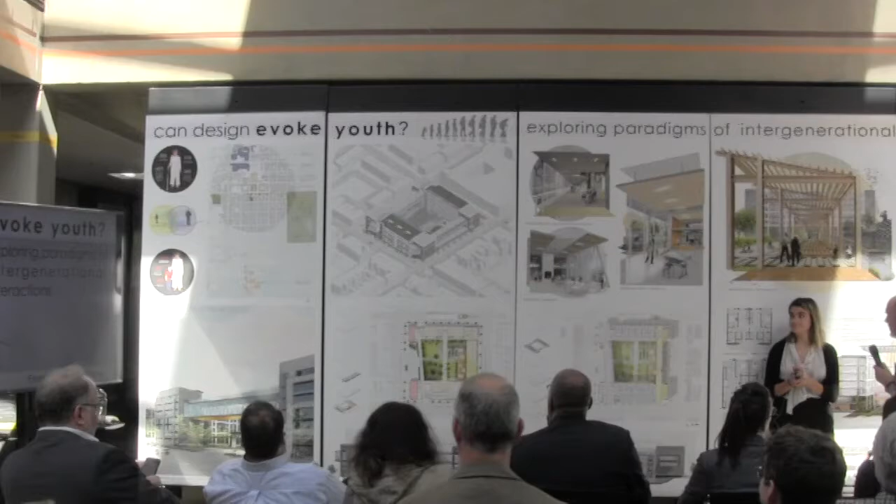To Baltimore? Baltimore, okay, not too far. Happy New Year. Baltimore.

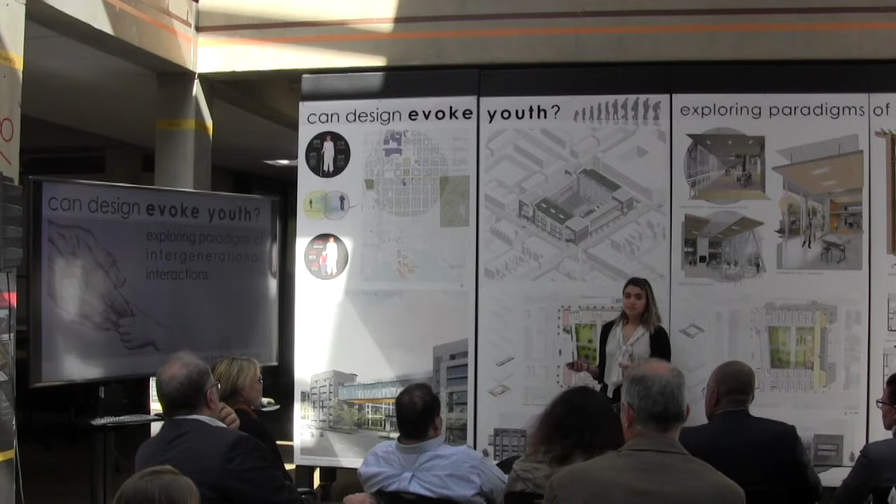Without further ado, I'd like to introduce you to the thesis, Can Design Evoke Youth? Exploring Paradigms of Intergenerational Interactions. This thesis challenges the way that architecture addresses aging, and presents unique opportunities to look at senior living in a new light, presenting opportunities to instill different social constructs that are more inclusive across generations. To begin, we'll start with the origin of the question, then move into an analysis of how we came to the site in Baltimore, and then into the design strategies that ultimately drove this final design.

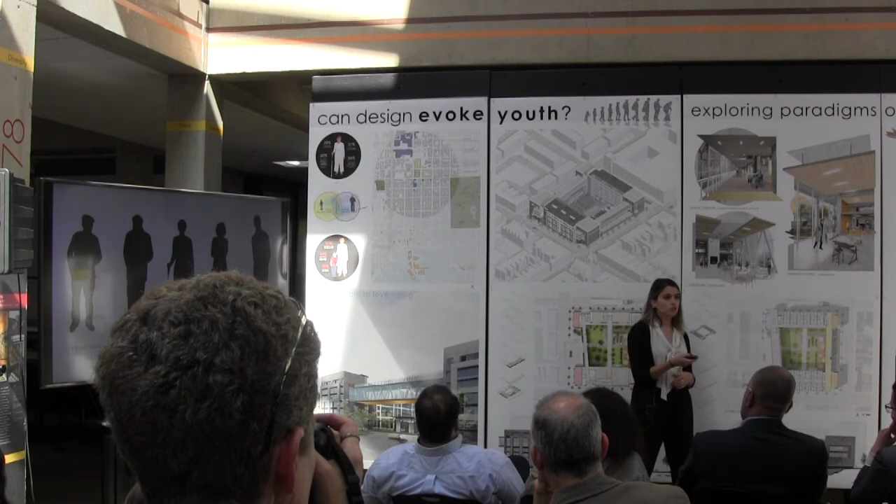So to start off, I have a question. When you think about aging, what comes to mind? What does aging look like? What does it feel like? Just think about it.

And then another question is, think about retirement. Now when you think about retirement, what images come to mind? What are the things that motivate you after retirement, after you've finished working on a day-to-day basis? What new life goals motivate you?

These are all questions that in the next 10 years, 1 in 5 people in this country will be faced with. Thanks to the baby boomer generation, we will be reaching a new high of senior population, people aged 65 or older. I believe that a lot of times these two questions evoke different images in your minds.

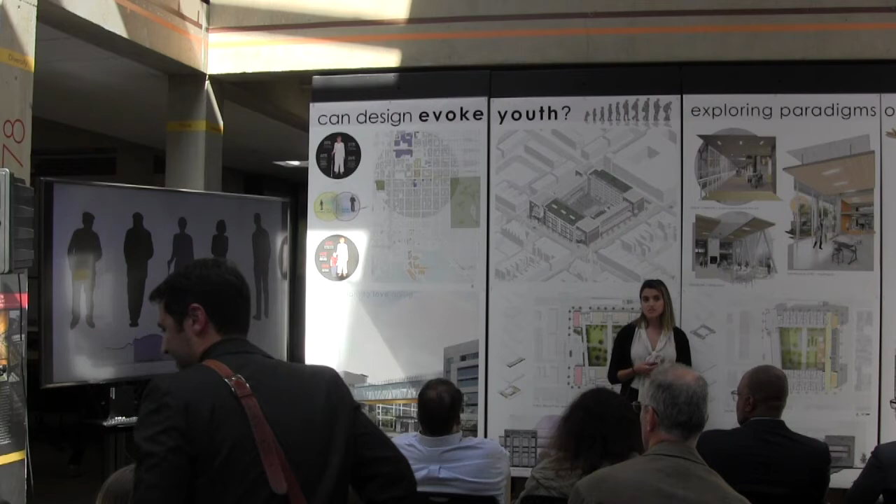A lot of times the idea of retirement might become associated with vacation, relaxing, or spending time with friends and family and grandchildren. Whereas when you think about the word aging, sometimes it's loaded with negative connotations, such as accessibility issues, or wheelchairs, or memory loss, all of these things that start to trigger negative emotions.

Now why is that? It's due to an inherent ageism that's prevalent in our society. In other words, this disconnect between younger and older generations. And this comes from a lack of understanding of what aging really means.

From a young age, we learn that it's scary to get older, scary to become an older person. And then once we finally reach the point in which we are older, we're suddenly faced with all of these new life obstacles that we don't necessarily know how to tackle.

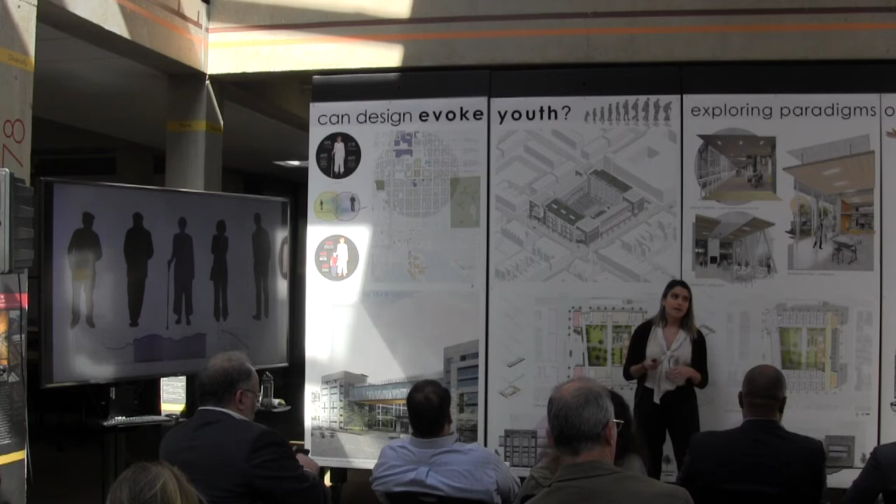This drives a wedge between the younger and the older generations, and ultimately starts to separate and segregate, resulting in social isolation of the seniors. And the seniors, as they become more socially and physically isolated, start to gain this sense of perceived loneliness. Perceived loneliness has incredible detrimental effects on your mental health and cognition, and can increase your risks of developing dementia. All of these things can result in this negative feedback loop.

So as these seniors are encountering these new life changes, these new circumstances, they might find themselves frustrated or irritated and start to feel further disconnect from those younger members of society. So how can we start to tackle this problem? How can we begin to rewrite the narrative of what aging really means?

Well, let's start at the beginning. By introducing young children to the concept of aging, by integrating them into spaces with seniors, we can begin to retrain the way we think about aging and what it means to be an older senior.

83% of retirees agree that working during retirement allows them to stay more youthful, while 45% are particularly interested in working with children. This is all because they gain a new sense of purpose, meaning, and a revitalization in youthfulness through this engagement and interaction.

On the other hand, children have much to gain by having this kind of mentor-mentee relationship with an older, trusted adult. They have the opportunity to gain valuable life lessons and learn new life skills from much more educated and experienced members.

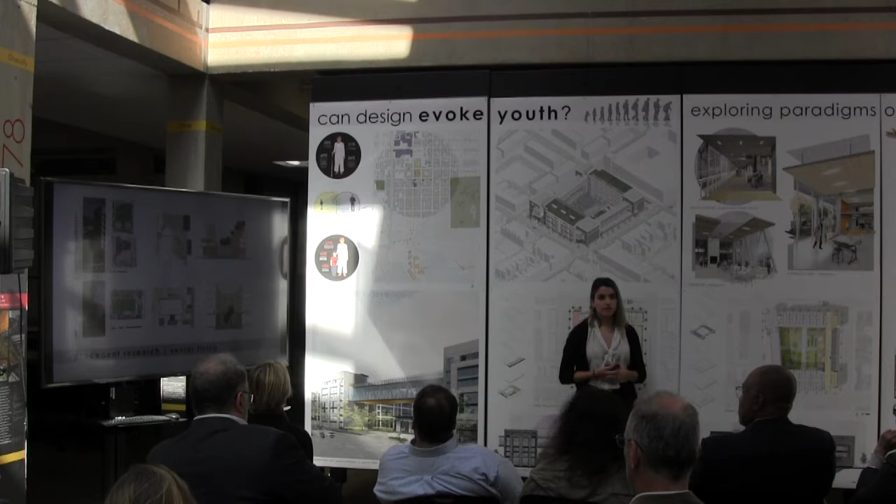So this led us to some design strategies that were accumulated by studying precedents. We began with looking at senior living precedents. Naturally, if we want to design a building designated for senior living, we want to be sure to understand the positives and negatives that exist in current models.

And something that I came across in this study was the common theme of organization around a central courtyard. There's a common outdoor space that is used by the seniors and sometimes by the public as well. This is often either directly next to or a little bit set back from where the seniors are living, allowing them to interact as they so choose.

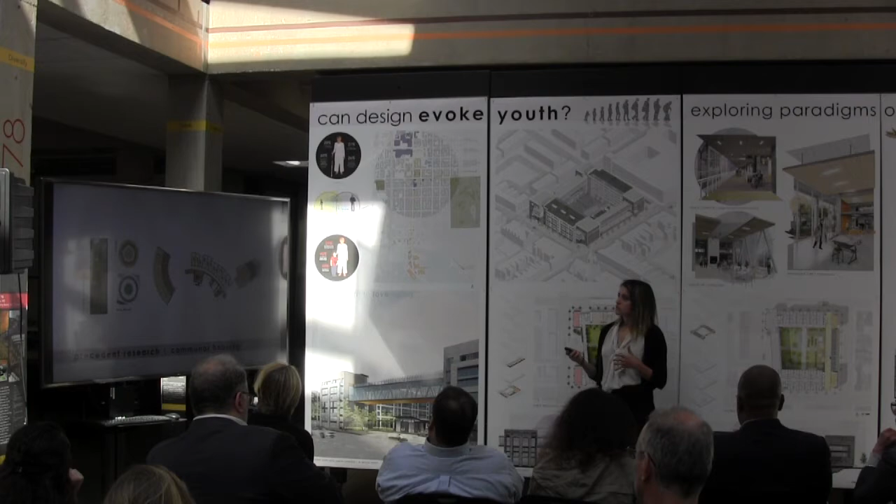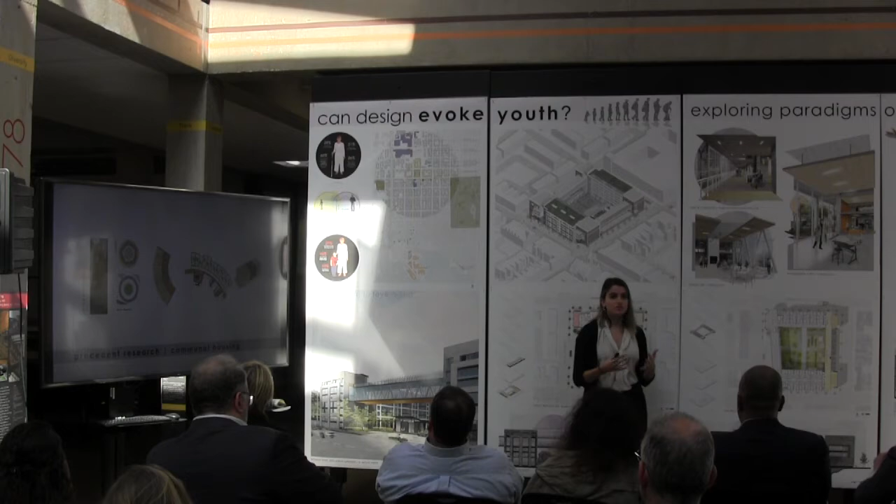Moving forward, I also looked at communal housing, specifically student housing, both international and national examples. This is because student housing has a similar goal of creating spaces for students that allow them to have independence and secure spaces, while also maximizing opportunities for social integration and social interaction with each other.

And then finally, I looked at examples of early education models, and this was to not only design spaces that are fun and engaging for young children, but also to look at the way they too have an interaction with nature. They often have outdoor spaces for children to get outside and play around and not feel boxed in.

And so altogether, this drove several precedent principles, which began with senior living and ended in that early education model. These principles include designing spaces for spontaneous interactions, allowing children or seniors or both to find opportunities to passively and actively engage with each other. It also reinforced that idea of the threshold between indoor and outdoor, having different types of spaces that remind them constantly of nature and the outdoors, and then giving them spaces not only for their own independent zones, but also allowing them numerous opportunities to engage with each other and the community around them.

And finally, there are principles too that pertain to the particular senses, which include looking at the use of light and color, the use of haptic feedback, and once again, that connection to the outdoors, both for materiality and space design.

Moving on to how to implement these design principles into a design, it's important to understand that there need to be sacred zones for seniors and for children in a space like this. Realistically, seniors won't want to see children 24 hours a day, so they'll need spaces that separate them on occasion, but also intermediate zones where they can cross over as they choose, both passively and actively.

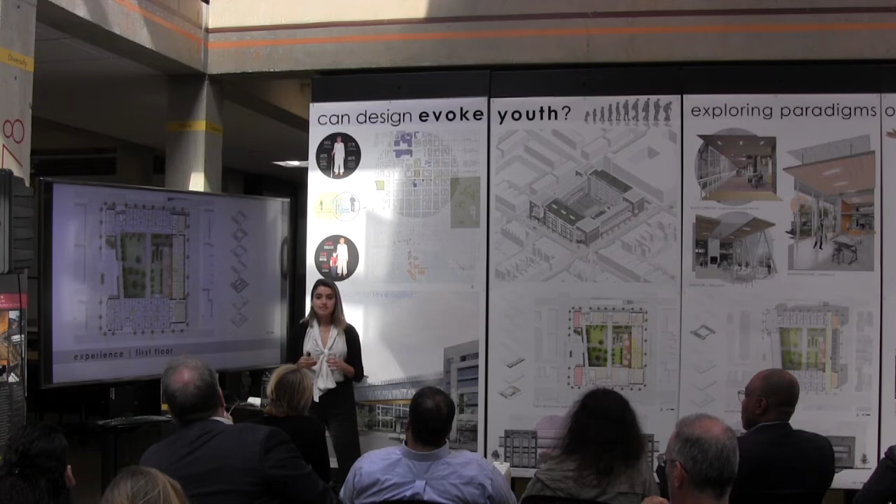If you look over into the west side of the building, this is where the senior living begins. All of their residences start here and move upwards. This doesn't have direct access to the learning center at this level; instead, you have to move through the communal spaces on the courtyard level. This again pays attention to security throughout the building by minimizing those breach points.

Finally, on the third floor, this is where those sacred zones pop through. In the seniors' sacred zone, pictured here, you've got a double-height space used for a general dining hall, but it can also be transformed into a community room. There are resources off to the sides that fuel those dining halls and needs, as well as spaces in those volumes that pop out for social spaces and lounges.

And in the children's sacred zone on the right-hand side is a library. This is a sacred zone just for the children where they can read and learn and play, and then observe the activity happening down below.

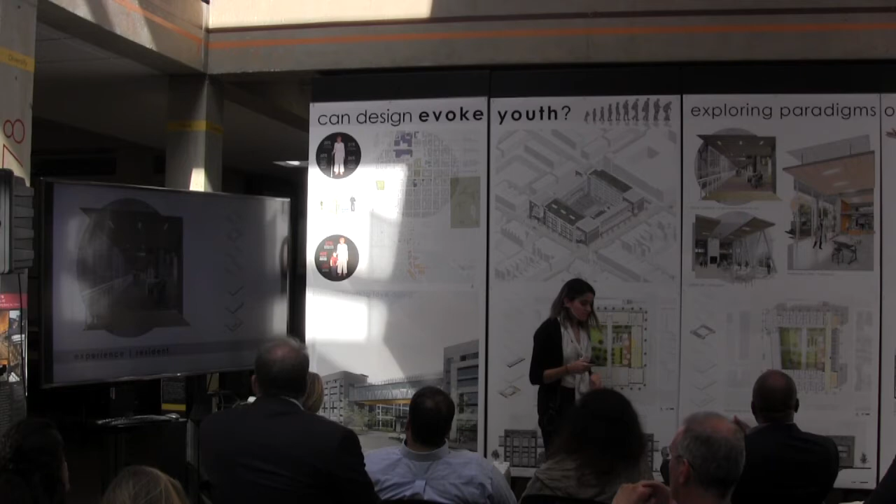Before I wrap up, I want to walk through the experience of this building as both a senior and a child. As a senior resident, you might wake up in your apartment and walk out into the hallway, look out into the courtyard, and observe the activity happening down below. You might also turn to your neighbor and sit on your porch to have a conversation with them.

You might then proceed down the hallway into the dining hall, where you have a communal breakfast with some of your friends, while others might be spending the morning having breakfast in their own homes, where they're provided their own kitchenettes.

For that afternoon, they might decide to go downstairs into the intermediate zone, the first zone on the ground level. Here they might spend the day painting, making music, or exercising. In these kinds of spaces, they can start to interact with children, since these rooms have been designated as spaces that can also be used by children in a safe and friendly environment.

Then they might move their way down through the courtyard, down this pergola, from one wing to the next. Through this pergola, they might walk from the music room to the exercise space, or from the swimming pool over into the art space.

From that movement, they might decide to move into the learning center. As they move through the learning center, they might pop up into the entry corridor, into the entry atrium, where the cafe is on the ground floor.

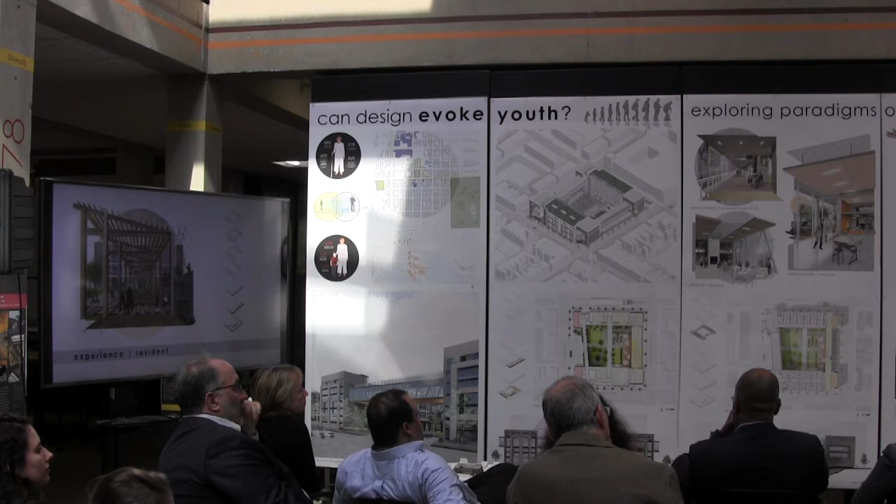There, they might sit and enjoy a cup of tea while reading a magazine and observing the children entering the daycare for the day and running around. They might also proceed down the hallway and see more children running around in the collaborative learning environment, running in and out of the classrooms.

They might also enter one of those classrooms and use this as an opportunity to teach a life skill, such as art or music, to one of the children in these flexible classrooms. Finally, they might spend the rest of the afternoon in the art gallery at the final culmination of that hallway, and up above, you can see children walking around a catwalk.

At this point, I'll transition to the perspective of a child. This child has just walked out of his sacred zone into this catwalk, looking into that atrium. Down below, he might see a performance going on, he might see people observing the art, and he may decide that he wants to go down there, or perhaps he's a little bit shy, and he decides to step back into that sacred zone.

Here you can see there are small openings for them to observe more passively, without being as engaged as he might be if he were actually in that space.

Then finally, he may step into the sacred zone and go into the children's library. Here he might spend some time with his friends reading a book, or sitting on the stairs, or sliding down the slide and joining his friends at the bottom.

He might then step down into the ground level, or take the elevator or the stairs down to the ground level into these classrooms that are either private, specific for the children, or these flexible classrooms where they can again engage with those seniors in a learning environment.

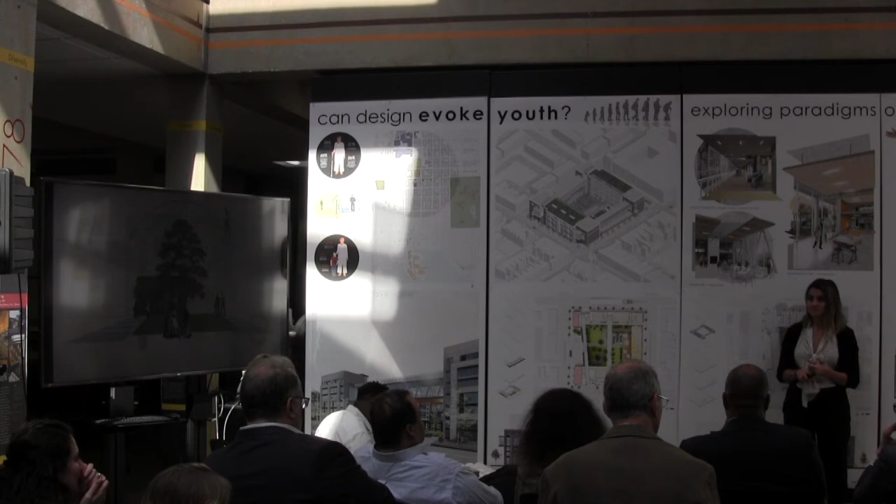How big is that courtyard? What are the dimensions of it? So the courtyard is about, it's almost a square, so it's about 160 by 160.

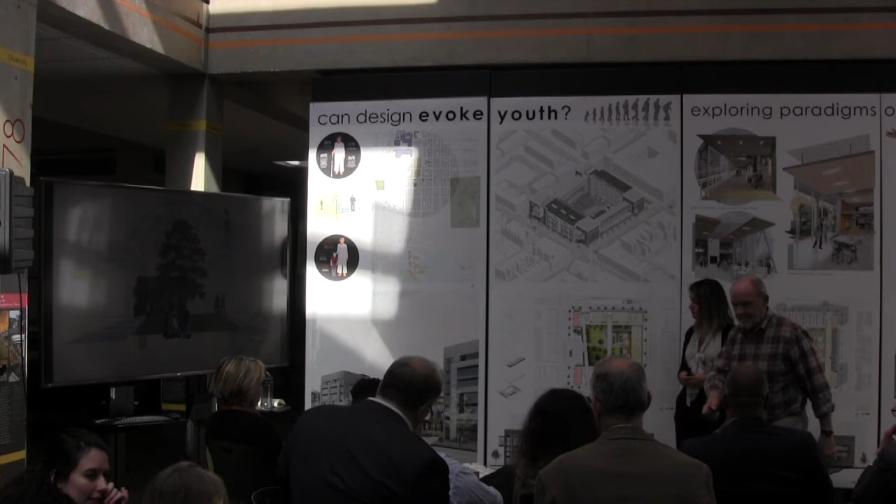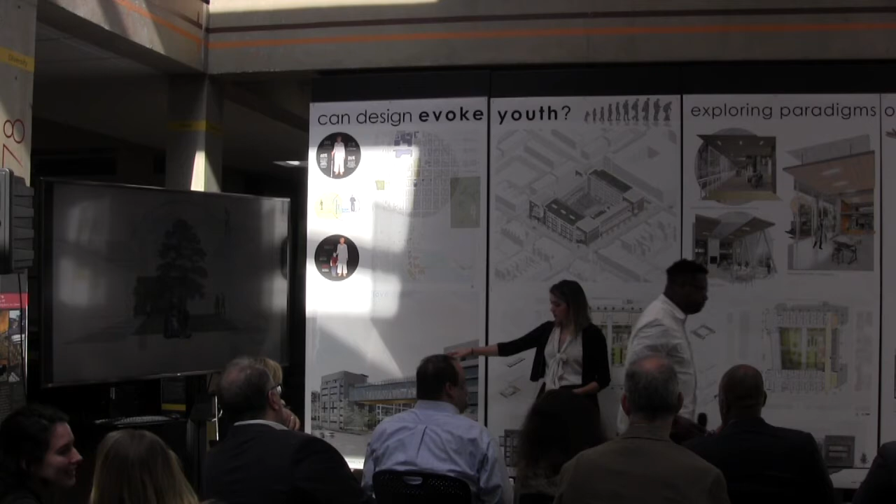Can you talk a little bit about the development of the facade as you walk down the street here? I think you showed it in that elevation down there. Yes. What's the actual pedestrian experience as you're walking along this building? So yeah, that's also in this image here. As you're walking down this street—sorry, let me remind myself, this is Wolfe Street, and this street leads up to Johns Hopkins Hospital. As you walk down this corridor, you see the bridge between the two.

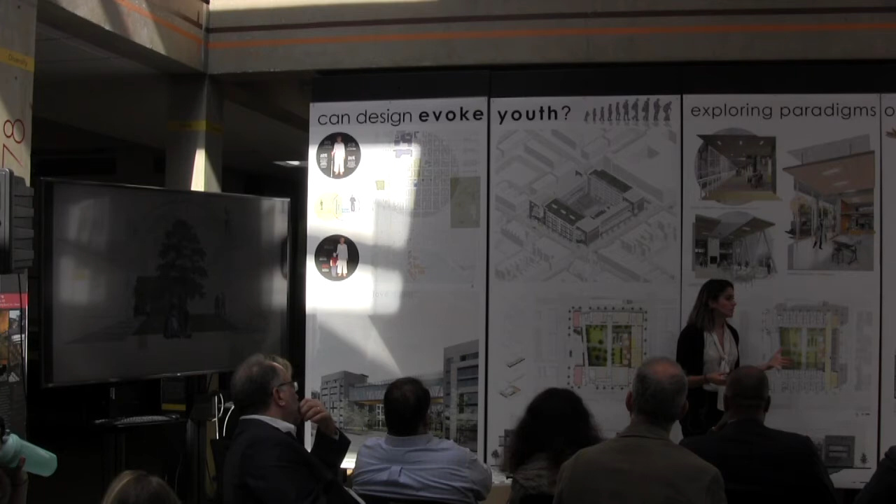You're actually able to look inside the courtyard between the two residential wings, so that's beneath here. Is it open then? Let me see if I can find a good image of it. There's a pergola, similar to the pergola happening in the middle of the courtyard in this big image here—there's one at the entry point as well. There's a welcome house in the center that you enter through, and then you walk through the pergola to your residential wings.

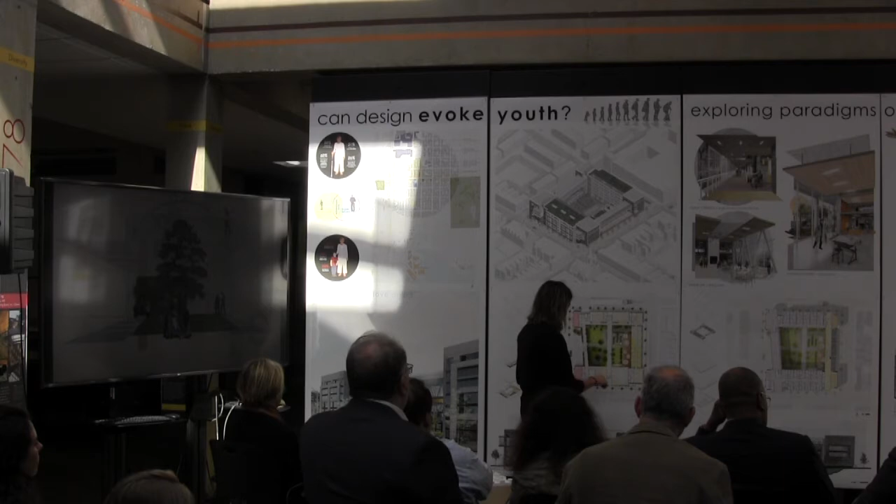So as I look at this elevation, what am I seeing? This is the opposite side of the building, actually—this is the learning center. So the one you're thinking of is this one here. You see the welcome house with the pergola, and there's a lot of landscaping and small walls that prevent you from just walking through to the courtyard. So you have to first enter into that welcome house before proceeding into the courtyard.

So it's a secured courtyard? Yes, it is.

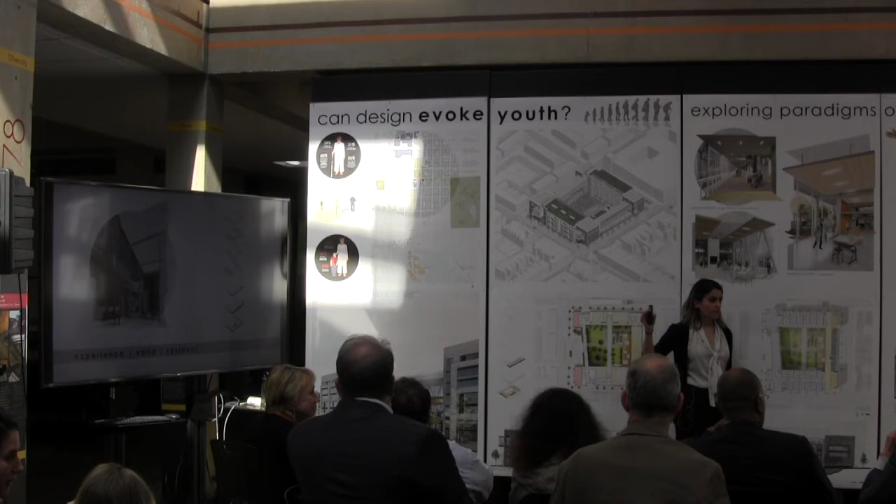I have one quick question. How do you get from—if I'm a child and I'm in this area down here, in the learning center—and then I want to go up and be in the sacred space, what path do I take to do that? Certainly, so it might be hard to bring the image up on the screen as well. This is the entry hall. So when you walk into the learning center, that's this space here. You walk into this volume, and when you walk inside, that's what you see.

Where is that on the plan? Over here. Okay, so that's like a triple height space. It's a triple height space, so that gets you from the learning center all the way up to the sacred zone. Where exactly—you're sort of bypassing, and so then on this side, is that also a triple height space at the bottom? Yes.

So those are those two giant spaces that connect you across. And what was the thinking that made that space become elevated a full—obviously you're building a roof and then building an underside—so what is the thinking behind having the gap in elevation? I wanted to enhance the sense of separation in certain private spaces.

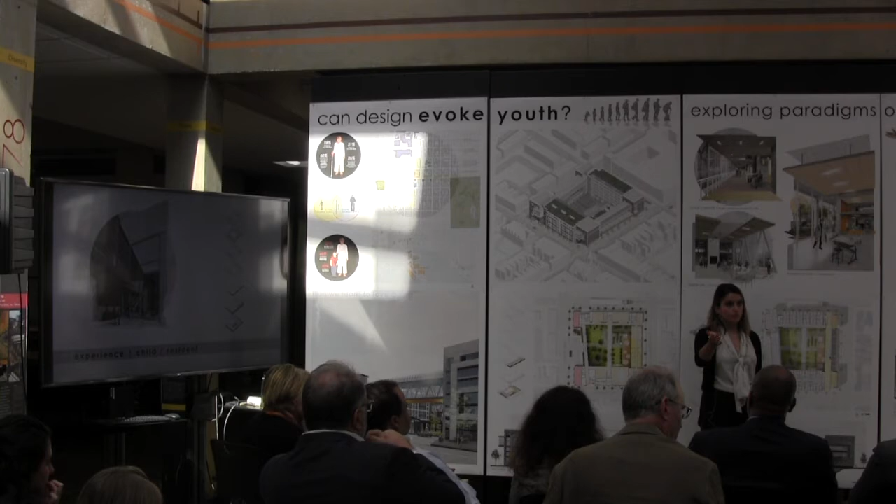Since this whole building is really integrated amongst itself, it creates a lot of spaces where the seniors and the children can overlap. I wanted to make it both visually and physically clear that there's a difference between the zone down below and the zone up above. Pulling them apart creates a sense of passing through a different threshold to get into a new type of space. If they were on the same level, it might feel more accessible for anybody to enter, but I wanted it to feel like a sequence you have to get through to reach that space — a sequence only the children should really be experiencing.

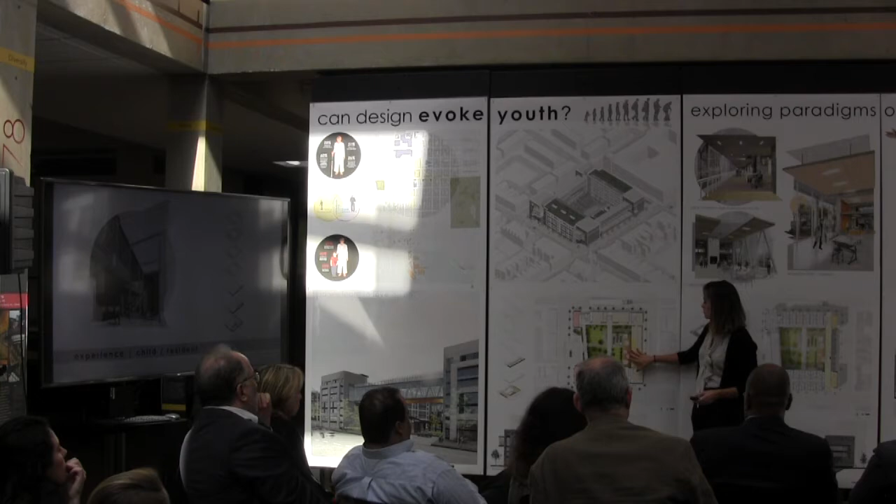Do the children ever use the courtyard? Yes. Where do they access it? The courtyard is accessible on the ground level, but their own little play space is immediately accessible from the mezzanine level. So you have to walk down a level from this entry point to get into the first courtyard. I wanted to keep the courtyard primarily on the same level as where the residents live. Is that the section right there? Yes. You walk in through this entry level and then walk down this big staircase, which you can see in this image, and that opens up into the courtyard.

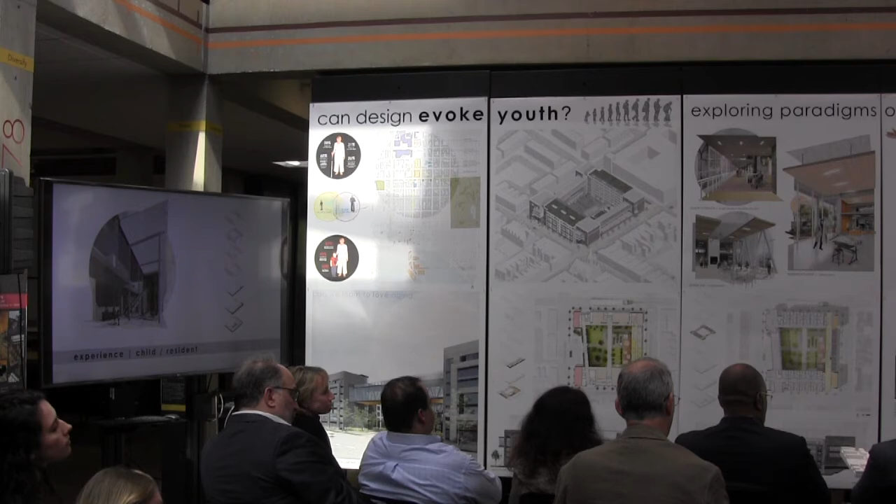Did you ever look at having all three levels together as one piece, without the gap in between, right here? I did. Originally I had some different forms — I have a lot of study models. Some started with almost a C-shaped building, with some sloping aspects. Ultimately, I explored the idea of the roof plane being accessible, but my fear was that people coming off the street would start to wander onto and into the building, breaching its security. I explored this for a long time, but ultimately decided I wanted to keep that sacred zone sacred, to emphasize how important that space was for the children — that's where the elevation came up.

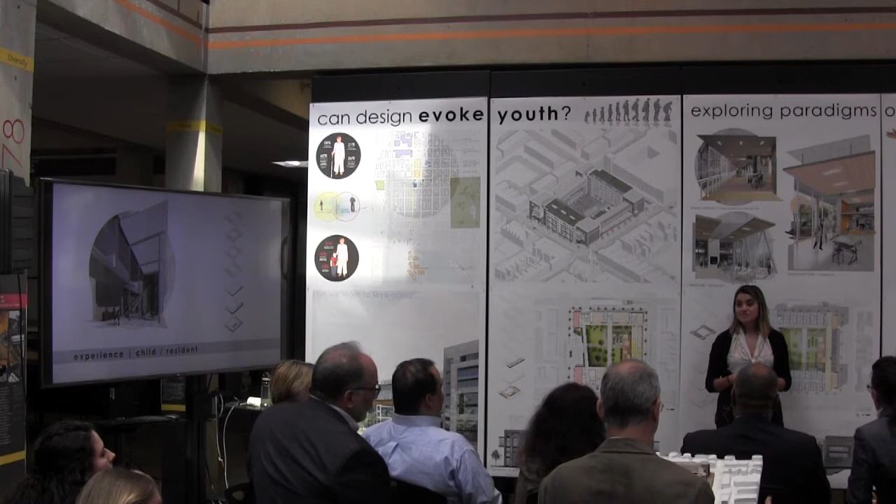So when did this roof — the courtyard canopy — come about? That's something I tackled for weeks with my chair and Carl Dupuy. We talked about it a lot, going back and forth. A few weeks ago I decided it's best to use the canopy to prevent limiting the courtyard to only part of the year. I didn't want it used only from April to September. I wanted children to be able to run around, since they're less deterred by colder weather, though maybe a little deterred by rain and snow — they're children, but a little bit. I wanted to provide optimal opportunities for them to use it year-round.

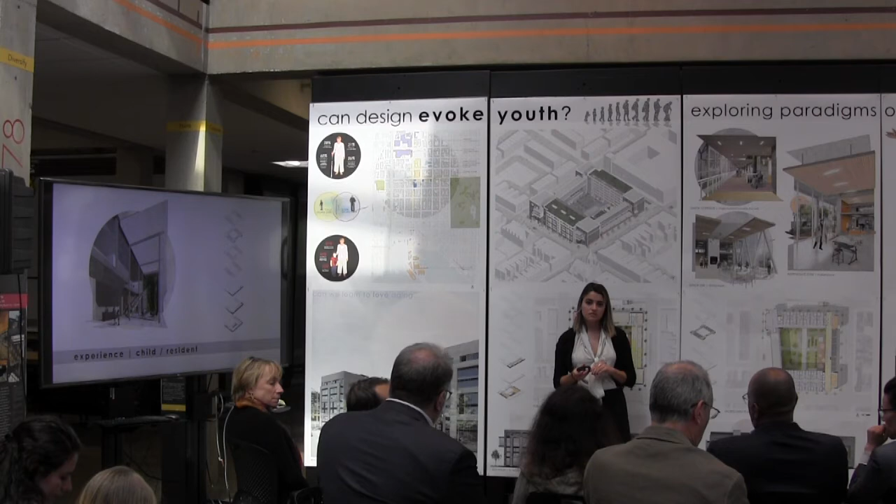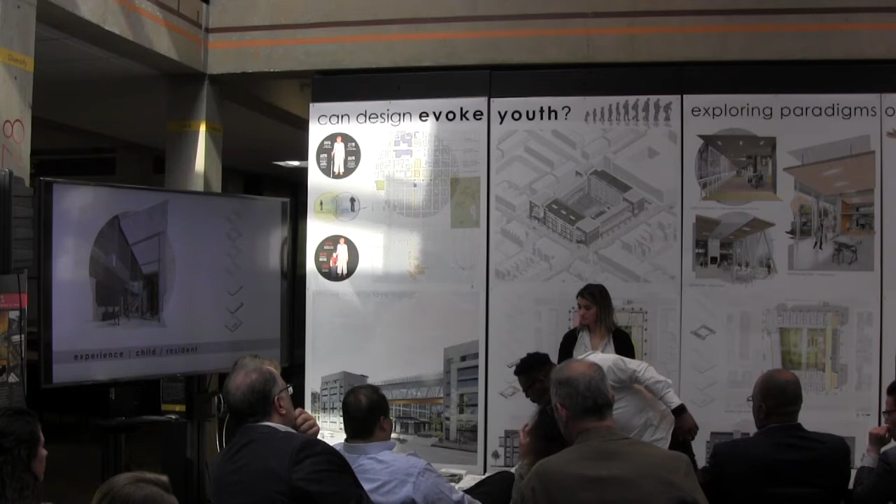So, did you interview any seniors? Yes — actually, do you mind if I respond to that? I completely agree with you. I don't mean to imply that seniors don't do any of those things.

In fact, I want to bring it to attention that they do. I want it to be known that spaces designed for seniors—the issue I have isn't with the people, it's with the spaces designed for them. I don't think that if you look at a lot of senior living precedents, they foster spaces for that creativity.

For instance, my own grandmother lives in a senior living home in a suburban neighborhood, and it's not quite the kind of environment you'd think about wanting to live in. She's actually thinking about moving somewhere else because she doesn't like it. So I was using this as a means to design a space that allows people to foster that creativity and encourages them to stay active, creating spaces that cater to those activities, because I think it's important that we don't think of senior living as a building missing all of those things.

When we design residential apartment buildings, we often include all of these facilities, but a lot of times senior living buildings, in my experience, are missing out on a lot of these things. They're trying to cater to a type of person that's not really who they're thinking—they assume seniors aren't as active, or as creative, or as engaged as they are. So that's something I really wanted to focus on in this thesis.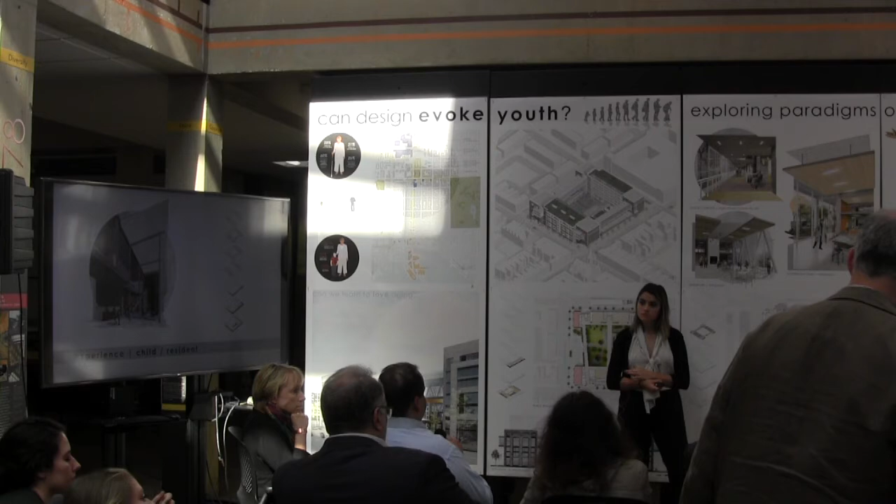The one side doesn't really need to be anything like the other. So that gap that we were talking about a little earlier, I think is sort of pointless. I don't know what that really does for you. But I will say, I think this is a really strong scheme. I also want to comment at the level of elevations. I think you've really designed a lot of this, and it's handsome, if I can use that word.

One other little thing, back to the bridges. This little welcome building you have there, get rid of that. They're going into jail, yeah, it's not welcome, it's keep out. Yeah, this little thing under the bridge, this is the welcome house, yeah.

That doesn't appear in your model. Was that something that came kind of later as a security measure, or? Actually, yes, it did come later. It did come after this model, but yes, it did come later.

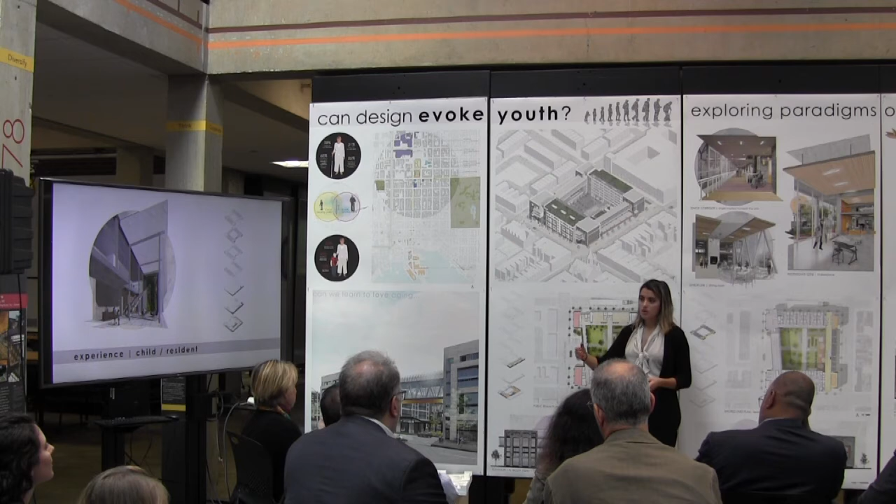It's something that I struggled with, I'll be honest, I struggled with it a lot. I wanted to introduce a level of security at that entry point so that not just anyone can walk into this courtyard, because realistically I wanted this courtyard to be primarily reserved for the seniors and the children. So without something there, it felt too open and too inviting and a little bit at risk of invaders. And so I wanted to have some kind of welcoming situation happen. That's something I've been exploring for a while.

Yeah, that might have suggested that maybe you actually put some program on there, on the first floor. It could still be kind of a glassy piece. I wanted to speak a little bit about the intergenerational concept.

I think it's a very powerful thesis and a beautiful building, very thoroughly documented. You've pretty much thought about every room in this entire project. But it sort of feels like a bit of a reaction against what we are seeing pop up all over around the country, these senior living communities, and it sounded like you've maybe spent some time there. So you're building kind of a very urban building.

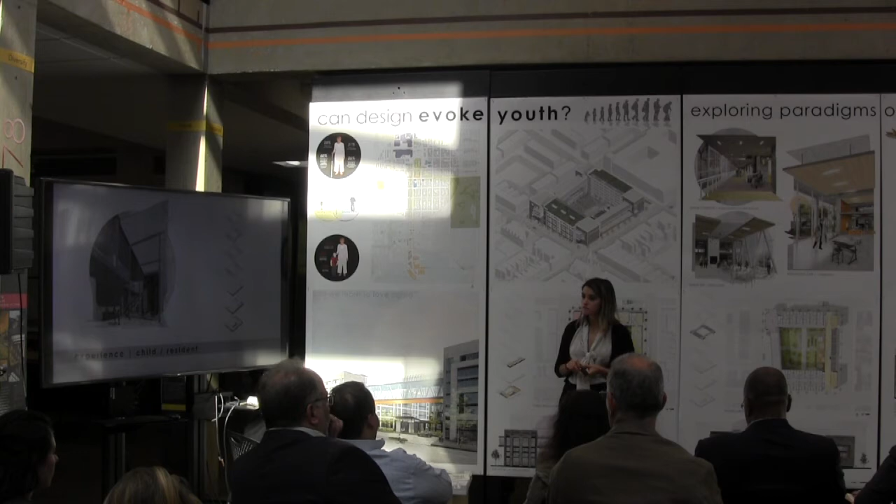It could be multifamily or, given where it is, but you're bringing together two specific age groups. And so I wonder if you thought about the concept of intergenerational, bringing teens to the building. It's like this is very much like a children's daycare center and, I don't want to say senior, a housing community brought together, but it seems like there's an opportunity there. The whole intergenerational thing is really powerful because in other cultures, people get older and they still are around their families or around people of all age groups. I think that might have been the root of Matt's comment.

In this country, it is a very lonely experience. I'm watching my parents go through that. They live in one of these communities that has all levels of care, so there's a building that has dining and some communal spaces in it. But other than that, they still have to drive everywhere, there's not even sidewalks, it makes me crazy. And the fact that you thought about the fact that people who live here use the surrounding community, they don't have to drive anywhere. That becomes a huge thing for people when they age, and not being able to drive and giving up that freedom can just be a downward turn towards depression and that sort of thing.

So I think the urban idea of a concept of senior living—I wish I could think of a better word for it—but intergenerational housing with a community center aspect is a powerful idea. It's a beautiful building and presentation. It's a nice project, Emma, and very well presented.

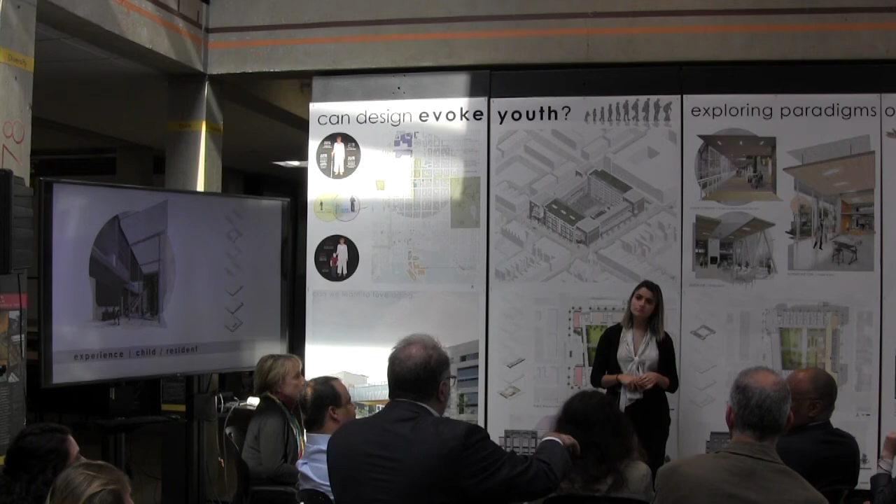But the thing I think is interesting about the project is we're critiquing it as though these two program elements are coming together, and there are a lot of ways buildings like this can be made to work. If you looked at traditional cities like Rome or Paris and studied city blocks, you'd find things like this happening—part of the block is an elementary school, part residential, part retail, and they find a way to resolve themselves in the city.

So today we're thinking it's a radical concept to put independent living folks next to it. It isn't—it's probably much more common in traditional cities like those I mentioned than you'd find today. If I were looking at it from that point of view, I'd probably do a couple things a little differently.

In the ground floor plan, I would have fewer of the service things on the outside wall, maybe. I might try to pack that stuff differently—I don't know if that fits into the area.

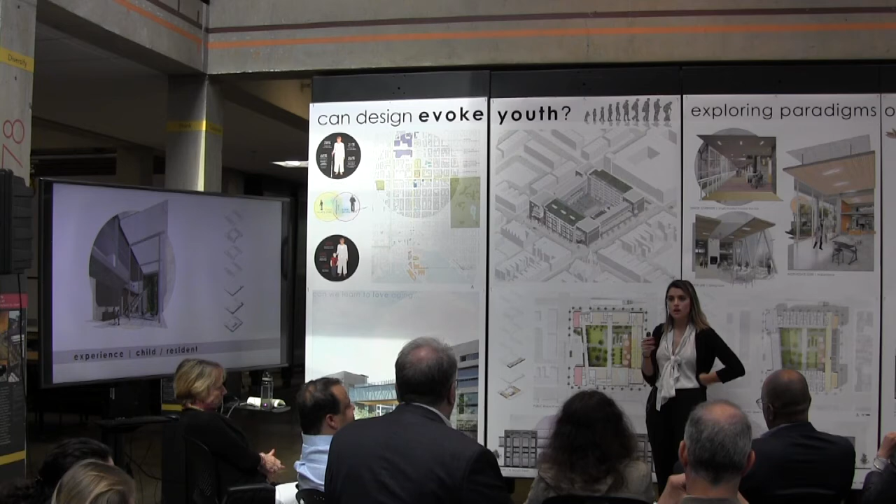Yeah, so I agree it feels a little strange, but the reason this is happening here is actually because if you look at the elevation, it's starting to happen underground over here. So they start to become tucked underground and wouldn't have access to sunlight anyway.

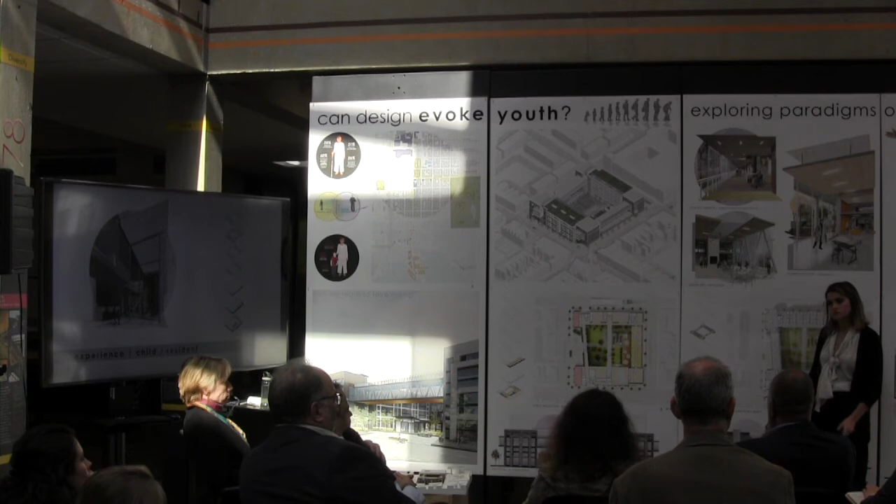Yeah, okay, fair enough. I think I'd be super mindful of how the building relates to the street. With a sloping condition like that, you obviously have to pick your battles. You've probably chosen well.

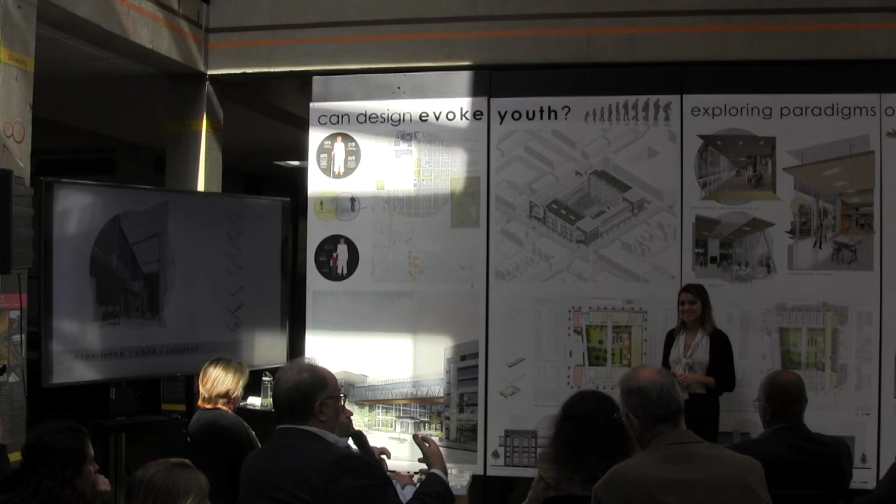The entry with the little gatehouse, I think, is sending the wrong signal to the community—it basically looks like a little police hut. One of the things they say about safe communities is you don't want a hut for the police, because it basically says 'unsafe.' So you'd want to probably minimize that kind of thing.

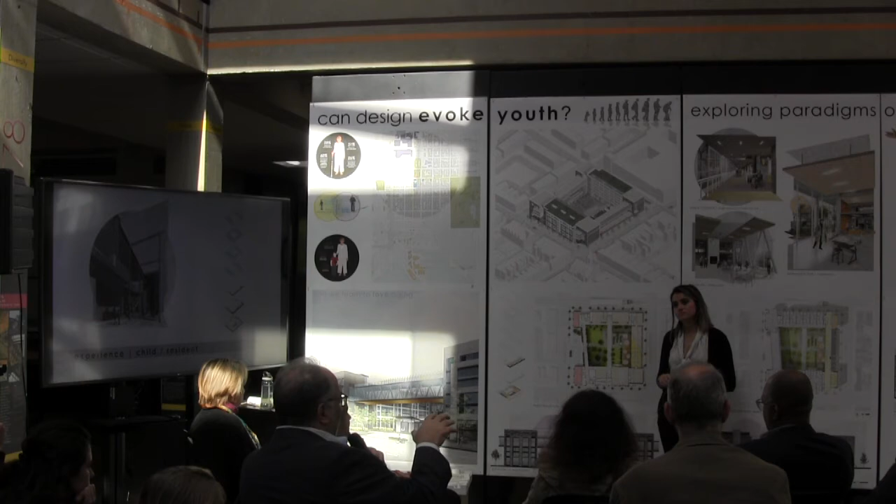The other possibility would be: do you actually enter the courtyard and have other zones in it that are more private as you go deeper? Instead of it being all private, you could go into it with layers of gates or level changes that allow for the level of privacy you want. Use the section, the slope, to do that—the slope is perfect for you to do that.

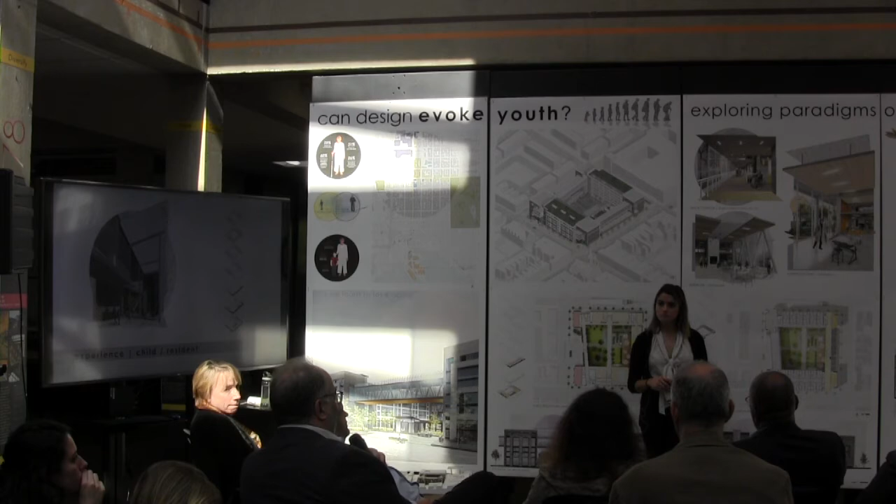But it is incredibly impressive, and very nice to speculate on this kind of thing in the city—two groups we want in the city. We want our older folks who are aging to have a place where they're welcome, and we want functional schools and nice facilities for the kids as well.

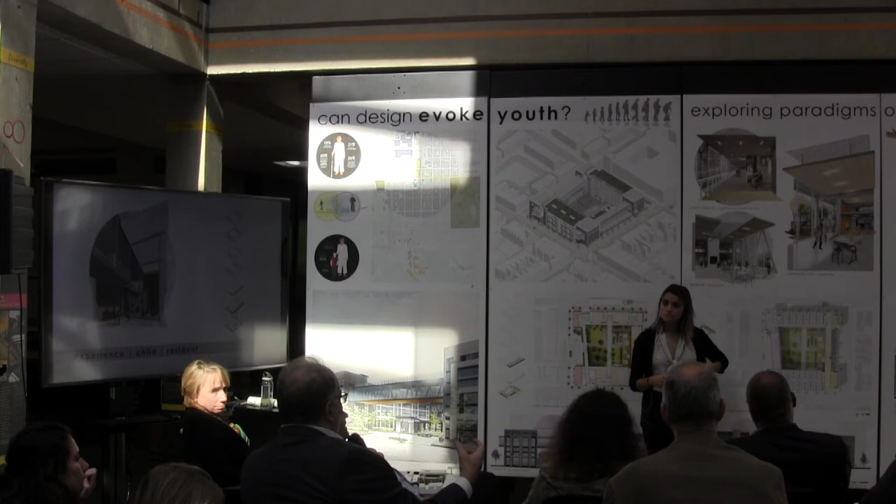And I think the courtyard—the only complaint I'd have a little bit is that the social space for the seniors seems a little overwrought to me, this kind of glass bridge and all the sun that's going to be coming in there.

You're going to cook them a little bit, but it makes me wonder whether maybe just having a nice space out in the courtyard or some level there would actually suffice for some of those things. It's the one thing that draws my attention in a way that makes me wonder whether you really need it to solve the problem of giving these folks nice public or communal spaces within the building.

I just wanted to pile on the congrats as well. I think your presentation is really easy to understand, the graphics are nice, and you've done a lot of thought. The one area I wish you would explore a little more is that you've only provided two different unit layouts, a one-bedroom and a two-bedroom. At first I assumed both families and elderly populations could live here, then I thought maybe not, so it was a little unclear. I think the reality is, for this to be the kind of dynamic intergenerational community you want, instead of two typologies you probably need about five to really span the gamut. I think that would have informed a few other moves you might have made around the building. Aside from that, the overall moves were quite well done and very nice.

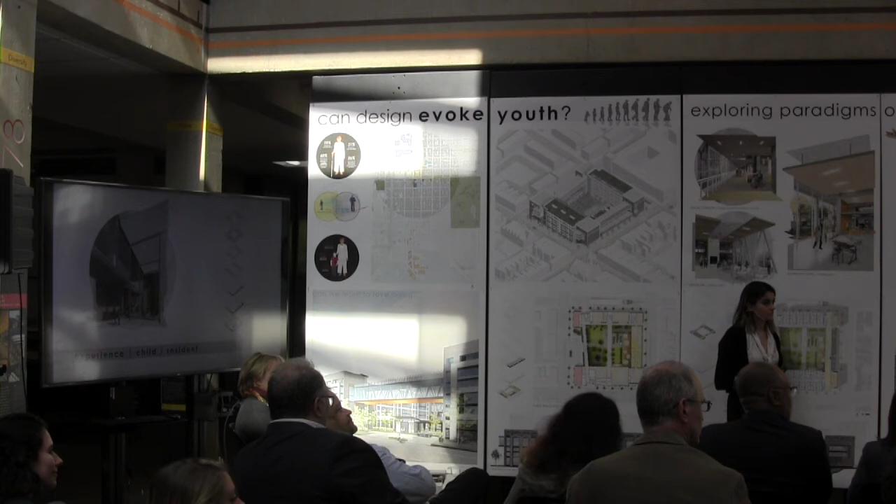As you were presenting, I was thinking about how I live in an intergenerational community myself. The building I live in is one I hope to die in — if I ever left DC, I'd never sell the apartment. Along Connecticut Avenue there are a lot of those grand apartment buildings, and they have everything from newlyweds and empty nesters to very senior people. They also have the walking environment that's so essential. My mother moved into the building ten years ago, having never lived by herself or in the city before, and she's totally independent, to a fault even. Partly it's because of the neighborhood. Looking at buildings from Best Addresses in DC, like the Kennedy Warren, we've known people to age in place there. My building, the Broadmoor, and others up and down Connecticut Avenue are like that, and they traditionally had other programs too — the Kennedy Warren has a ballroom, a restaurant, a little store where you can buy wine late at night, and a place to pick up your dry cleaning. So there are all kinds of things that are part of this hybrid program that exists in real buildings. I agree, I think you'd want five or six different typologies. They're called NORCs, naturally occurring retirement communities.

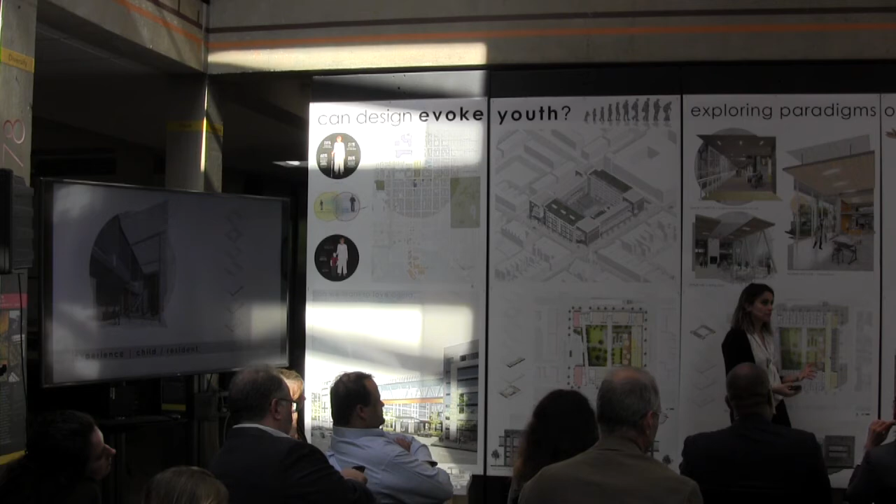Do you mind if I make a quick comment? I wanted to point out that I actually do have a couple of different unit types. These are the two most prevalent ones, but I also have corner conditions with three or four bedrooms, which could be opportunities for more families or family members to join. The layout was meant to encourage multiple styles of independent living, but the corner conditions aren't shown on this board — they're in the presentation. I agree, that's an excellent point.

Thank you. What material is the facade? This one? Yeah, it's a gray brick. It's huge. So is it— Yes, I think in these images the scale is enhanced.

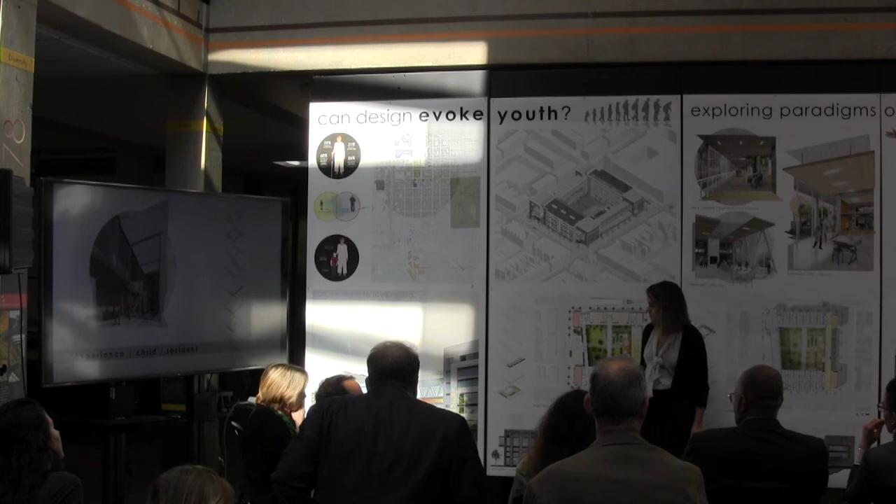Can you talk about how the facades relate, if at all, to any of the contextual buildings? I don't think you really touched on that.

Right, yes. So for starters, I wanted to bring in the vertical rhythm that happens along the facade. There's a push and pull where balconies happen or where the bedrooms project forward, and that vertical orientation was taken from the neighboring townhomes.

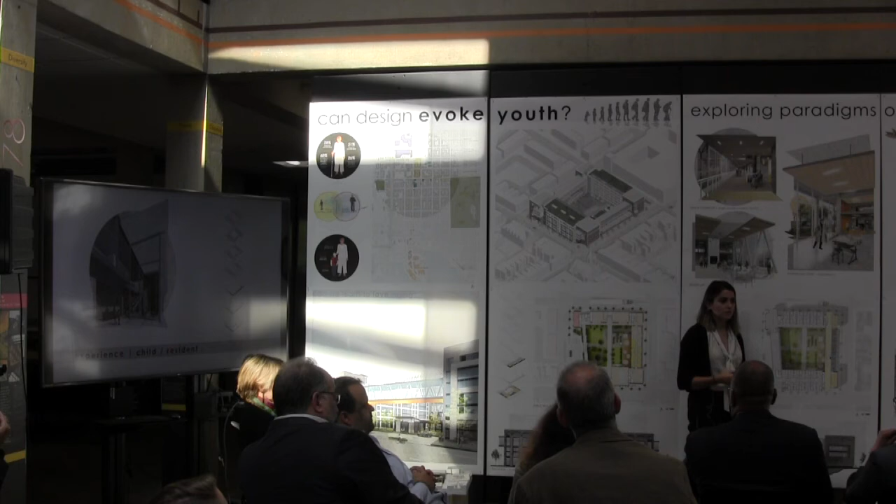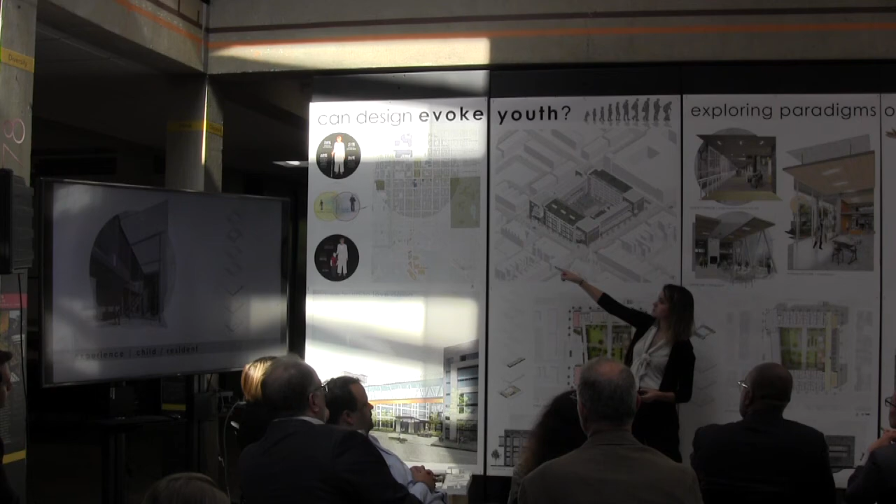Also, the actual design, particularly this facade, was heavily inspired by Union Wharf down in Fells Point. They have a very similar presence where there's a brick facade that's proud of another brick facade, and then there's a glazing element behind that separates the two. I took that into consideration when designing this, since it's actually on the direct axis of Union Wharf. Really the biggest change was the gray brick, because in that one it's red and smaller.

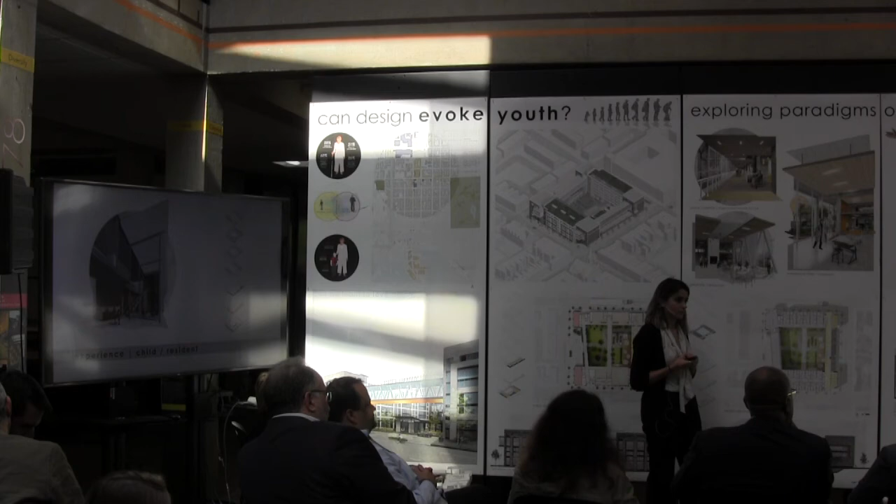I want to talk about the collage technique of your perspectives, because I think it's one of the first times today we've seen this technique used, and it's done really successfully here. We haven't talked about the graphics in every presentation, but this method is really playing to your strengths, and I encourage you to continue to use that and bring it to whatever offices you join.

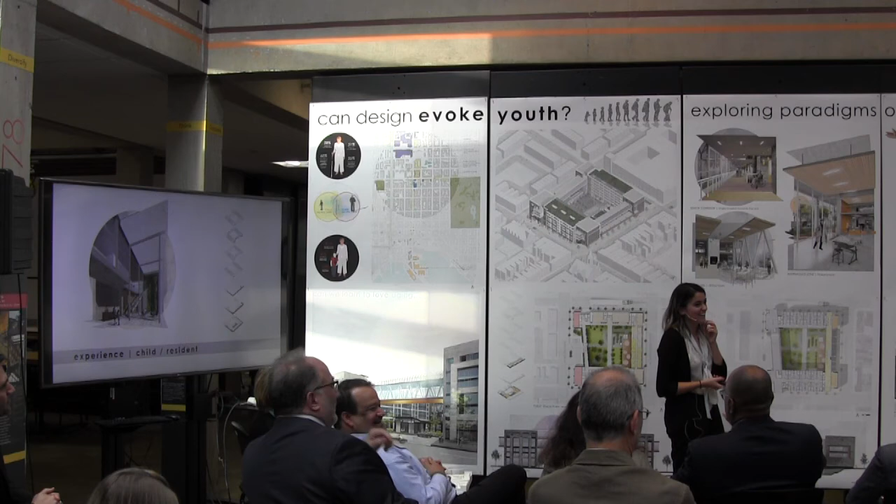One thing that can get a little tricky with that technique: there are elements like the steel beams and columns up here that have this wood slicing through them, which is suspect. There's a couple elements like that you might want to revisit as you touch up and put things into your portfolio.

But that technique, I think other students thinking about how to present their thesis should note, is successfully done in a way that allows you to push and give us the feelings without having to represent every single corner. When you're taking on as much as you did, that's imperative.

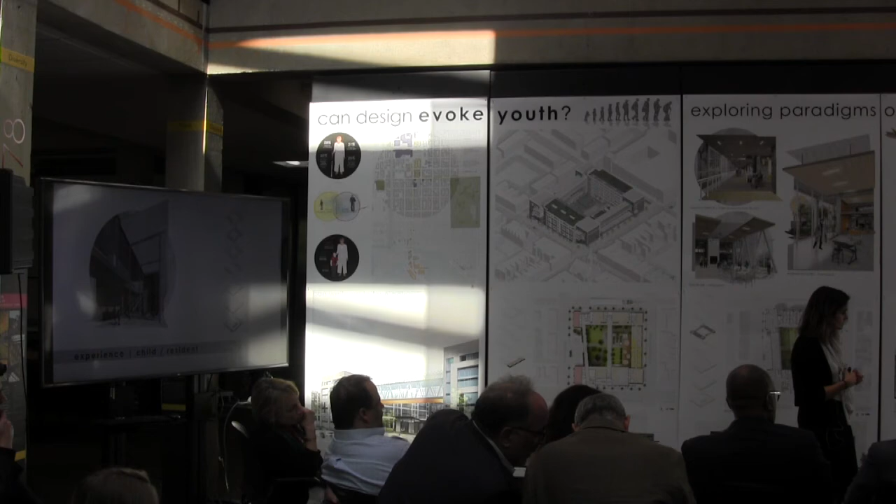So my only critique again goes back to this element right here, thinking about the scale of a child — this bridge piece is massive. You can see it in this image up there, and it doesn't feel like it needs all of that. You've got this very fun character happening on the ground floor, which in this image down here is very tiny, almost minuscule, and then it's just overpowered by this bridge piece. If you spend any more time looking at this, that's one aspect I'd encourage you to revisit.

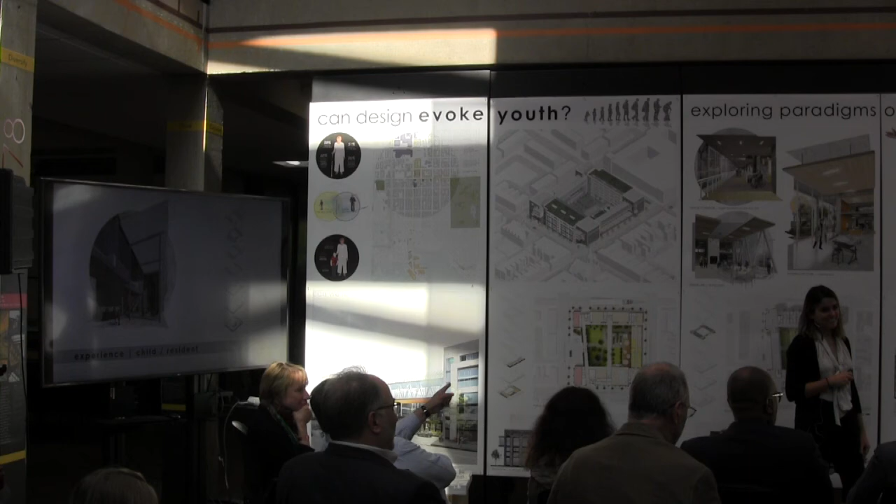Every kid I know would be under that stair. Yes, they look for cave-like small places, and they want to go hide in it. Anything they can climb on, but they're going to look to get under something, so I'll echo that. Certainly the seniors are not going to do that. Maybe Brian.

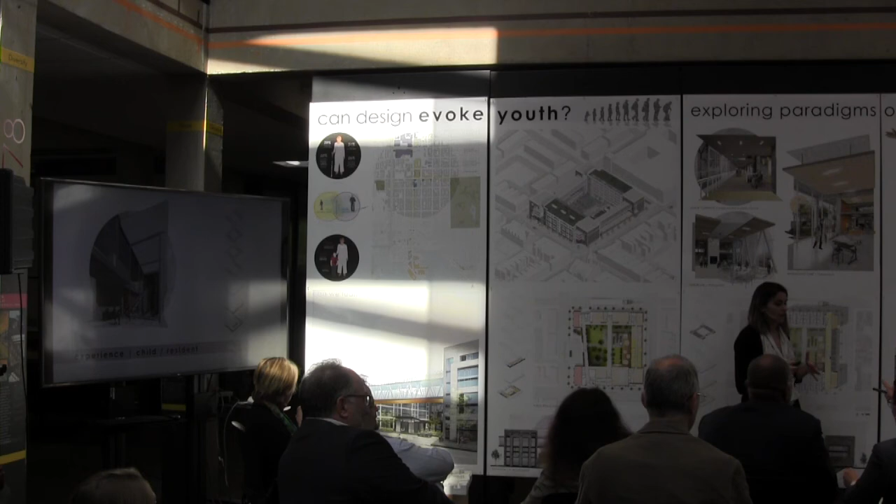What is that sort of tunnel on the east bank? I wanted to provide parking below the building, and I explored different options because I didn't want the parking to intervene with the building. As a solution, I talked with some of my professors, and we talked about maybe moving the entrance to the street level. So the entrance is through the street, which I think is seen multiple times in Philadelphia as a precedent.

Actually, your courtyard's big enough that you could have had a double-level courtyard, with the parking under one of the levels. The entrance to the parking is what I struggled with the most — it's located under there. You have this slope built in, so you could stick the parking in the slope. That would get rid of a lot of problems with this entry issue, just by changing a section of the courtyard.

So you were pushed into public space — it was something I explored for a while, and I didn't want it to take away from the integrity of the building, so that was my solution. That's the challenge we always have to deal with, and that's what makes it an urban project — public realm stuff that you can't control. If you've ever been to Toronto, where they were very licentious about this topic, they created some of the worst streets in the world, where walking down the sidewalk means constantly dodging cars doing insane things.

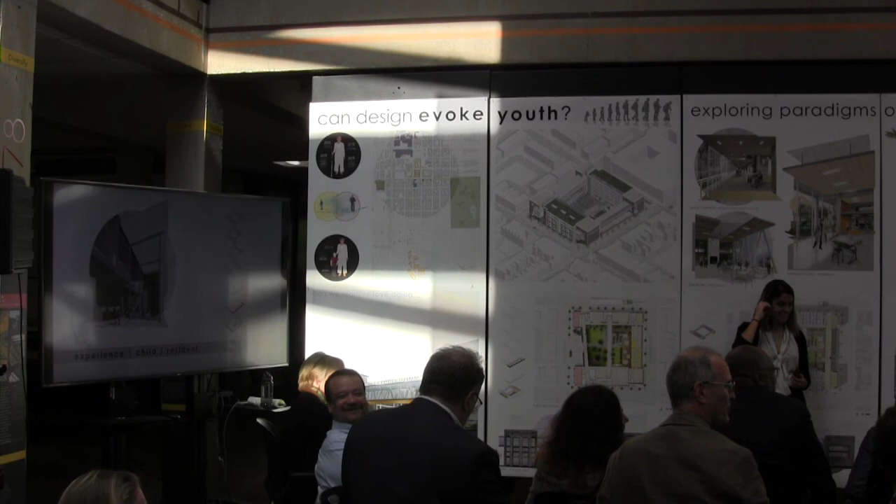I hate Toronto. Don't go there, go to Montreal. Go to Quebec, forget Toronto.

Emma, can you explain your elevation to east wall? What's going on there? What is that gray?

On the bottom, the gray zone, the translucent area. That's just translucent, so I made it translucent to show what's happening behind it, but that's the slope of the site moving along the site.

So those windows are actually - are they going underground? There's actually, it's something you can see here, there's a slot where you can walk down the stairs and it opens up about here.

Oh, so there's a levels gap, between the sidewalk there's a gap. And that lines up with the colonnade of the facade.

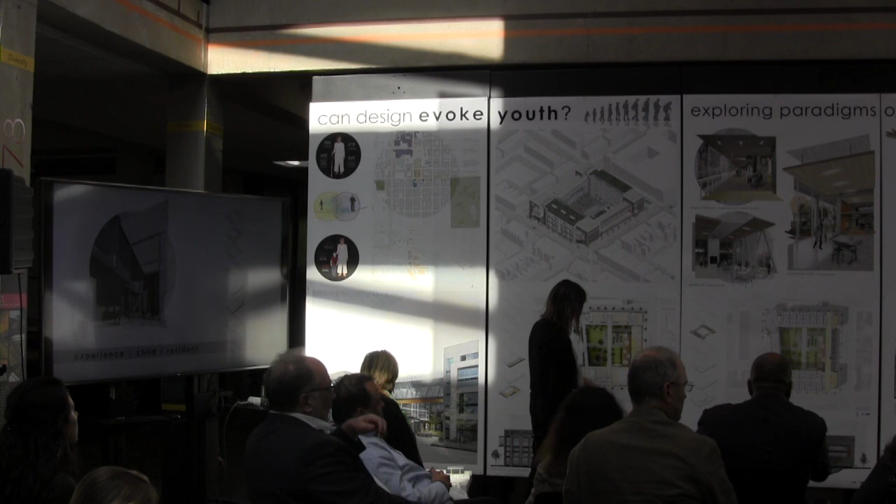So these are proud of the glass behind them so that you can actually walk between them, through here and through here. Oh, I'm sorry, not here because this is that elevation below. This is technically below ground on the mezzanine level, I think it should be correct.

Something that would help on your elevations would be stronger shadows. Okay, yeah, just for punch, because they are gray. Because in theory, then all of those should be in shadow, right? Yeah, oh, I see what you're saying, yes, they would be shaded.

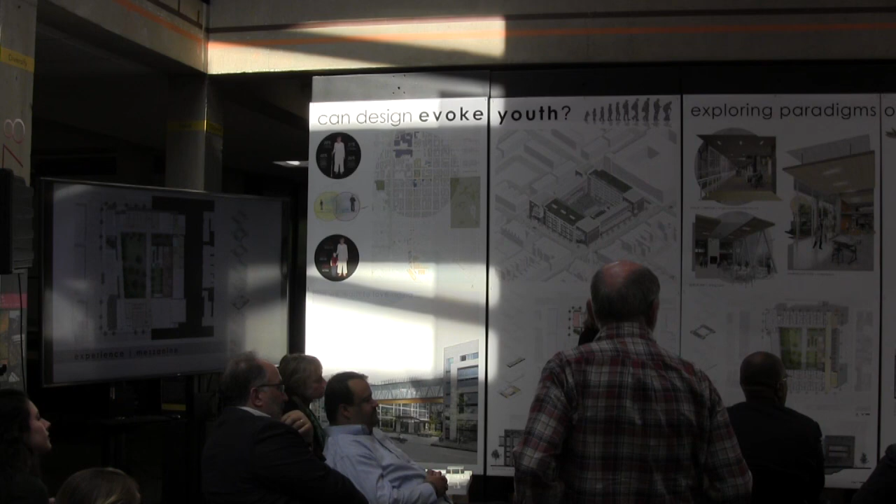Emma, this is a very skillful project, congratulations. I'm looking at your level 3 plan and the section perspective through the courtyard, and I'm wondering if you had explored putting the thicker double-loaded piece on the north side and the single-loaded and maybe a lower piece out on the south side to get more light into that courtyard.

Did you look at the massing strategy? Oh, I see. So I did explore - I originally actually had both as single-loaded, and then arose the question of density on the site, and so we took this as an opportunity to give those two types of experiences.

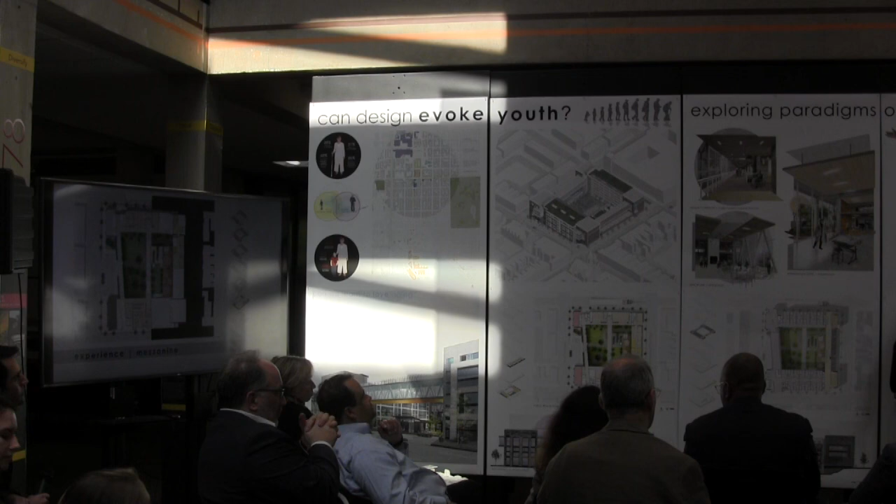I wanted the single-loaded corridor on this side to allow the residents to move down the hallway and have that frequent connection to the courtyard below. And then they have windows that face into that courtyard corridor, set back from the pathway, but allow the sunlight to come through still into that space from the south side.

It's a little, but it's an interesting exploration to change them around. I've gone through a couple of iterations of where the corridors are.

Emma, as your chair, I have the last words, which I'm very proud to say. I'm very happy for your work, and I'm very proud actually of the work you accomplished throughout this whole year.

Emma started with this kind of thinking about her own grandmother, so it was very personal to her. And I know she was the topic of conversations week after week, and I think she would enjoy this place a lot. Same as my mother, who just became a widow last year, and she will be the first resident right here. She's very active, but hates driving, so I think it's a perfect spot for her.

I have to say the graphics are quite lovely, beautiful. I think you have a very keen sense of showing exactly how to capture the quality of the space, and they're quite dramatic, quite lively.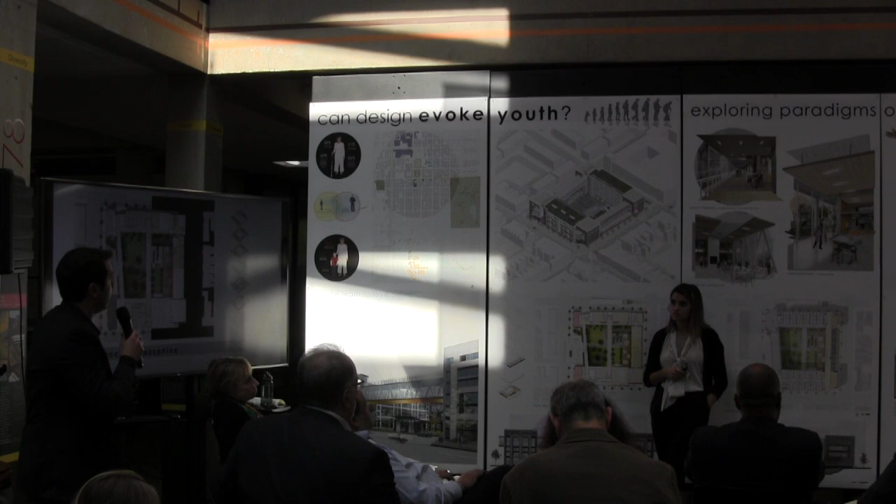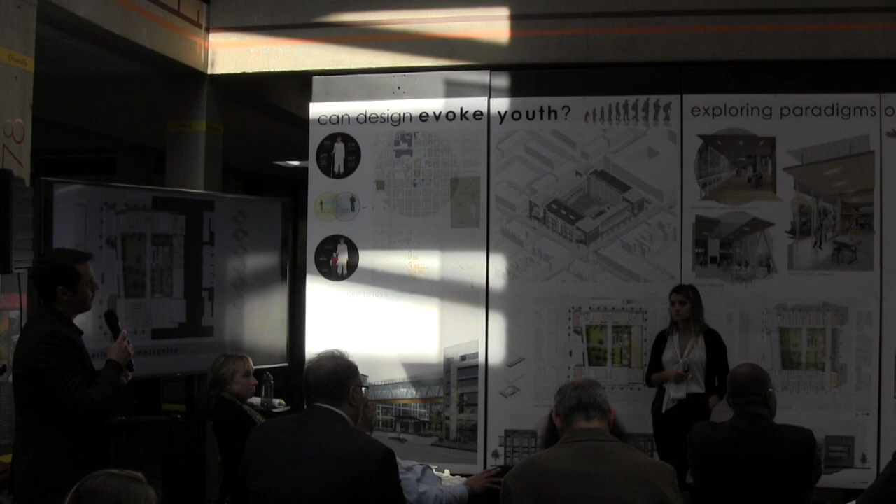I think you tackle on something that we don't talk a lot about in architecture, which is isolation. And it does happen a lot, especially in a lot of these senior homes. I work with developers in Chicago, a lot of senior homes, and they want to do as little as possible, because they just want to get their money done and rent a room, and that's it.

And I think you're creating a platform and a place where they can integrate with society and communicate and socialize, not only with the kids or another generation, but within people of the same generation. So you provide a platform in which they can create and work and think and live together, and that'll give them a few more years down the road. I think it's quite lovely and a very noble proposal.

Since the beginning, I really like your thesis. I mean, you got me hooked from day one in the thesis match, because I think it was very interesting - tackling senior citizens' places to live, which tend to become kind of cookie cutters.

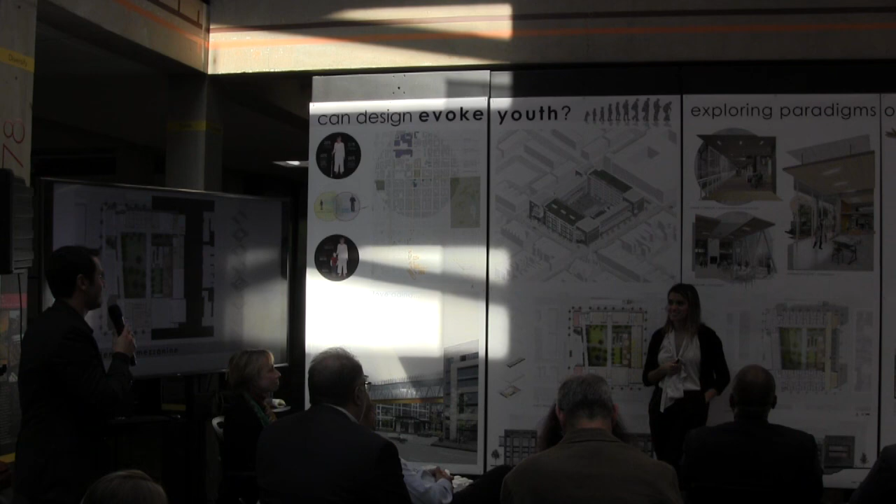I did a few of them in Chicago, and I got paid for them. Am I proud of them? Probably not, not really, some of them I'd rather not talk about. But this is something I'm very proud of and happy for you. I think it's quite astonishing and very beautiful. Thank you, congratulations.

I would ask the review...